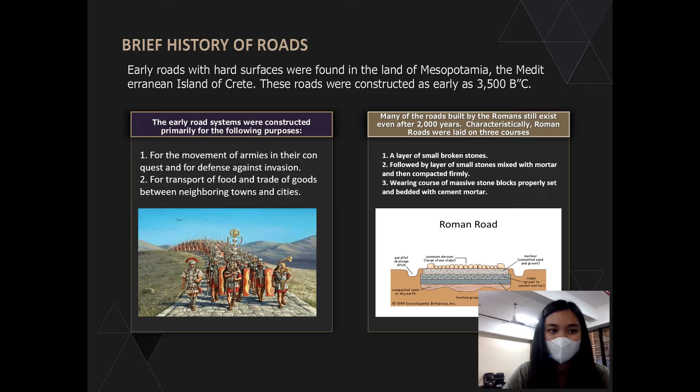During the 17th century, under the reign of Napoleon the Great, France made great strides in road building. Jerome Tresaguet created the first scientific method of road construction and maintenance in 1764, and he was successful in improving the drainage, stone foundation, and road grade.

Napoleon was able to construct roads and highways in France as a result of his achievements. He was a French engineer best known for his improved methodology for road construction. According to him, it is not necessary to prepare the top with heavy stones; instead, small and broken stones can be used. The benefit of this top layer was that it was rammed or rolled by traffic, so the stones jammed into one another, forming a stronger, resistant surface which offered less obstruction to traffic.

Thirty years later, a Scottish engineer born in Westminster Abbey, an engineer and founder and president of the Institute of Civil Engineers in London, improved Tresaguet's construction method by using stones with a minimum thickness of 3 inches, a maximum height of 7 inches, and a breadth of 5 inches. He also used a flat subgrade, which allowed for a variety of stones in the construction. He believed that by using heavy foundation stones above the subgrade, the road would be more firm.

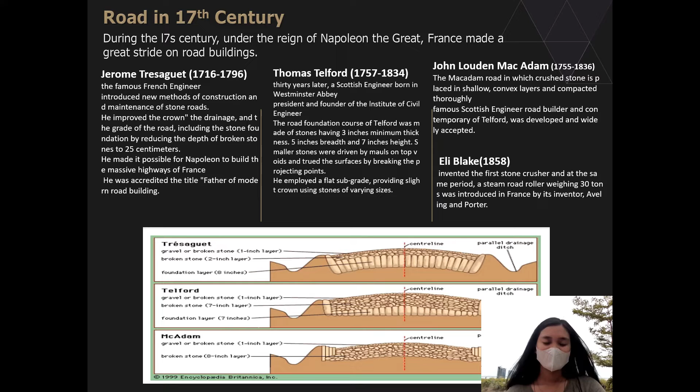It's incredible to think that modern engineering technology has transcended and simplified human activities over time. So let's go over a brief history of national roads in the Philippines.

Roads have historically been regulated for similar reasons. The early Saxon laws imposed three mandatory duties for the people to perform, namely to repair the roads and bridges, to repair the castles and garrisons, and to aid in repelling invasions. There was also a decree issued following the Norman conquest of England.

The King's Highway is sacred. Anybody who occupies any portion thereof by exceeding the boundaries of his land is considered to have encroached on the king himself. Roads are for public use, and all persons who want to use them may do so. So in conclusion, the king's highway is considered sacred.

Landowners should not go beyond the boundaries of the king's domains. Property owners adjoining the roads were required to drain the road, clip any bordering hedges, and refrain from plowing and planting trees, shrubs, or bushes closer than the specified distance from the center of the road. So those who live near the road must drain it and refrain from planting flora which may cause inconvenience to commuters. It was clear at that point that the public had a responsibility to protect and maintain the road.

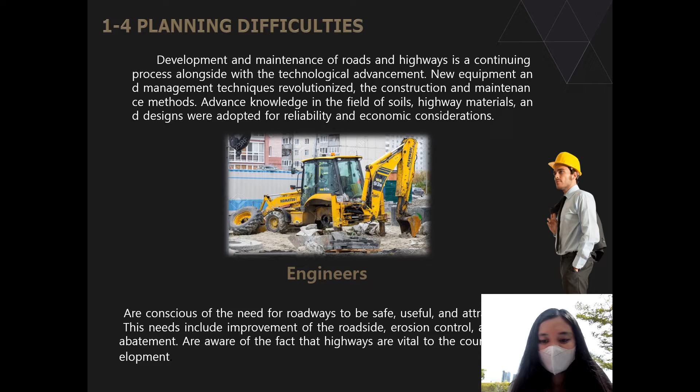Highway planners are confronted with problems categorized as financial, political, and technical. The present economic condition is related to government budgetary expenditures for payment of foreign debt amortization amounting to billions of pesos a month.

Comprehensive road development plans carefully studied by technical experts are twisted or flexed down by political muscles to suit political interests. Roads and highways plans were either deferred, amended, or realigned for political reasons. As a consequence, different laws with conflicting purposes and procedures impede or obstruct implementation, causing delay or no action at all.

Politicians now control DPWH projects as their source of political funds. Highway district engineers' qualification is simply subservience to the political do-what-I-say-or-get-out-of-my-district mentality. The listing of projects given to the district engineer has the corresponding name of favored contractors, the willing victims giving SOP in cash advances.

Rational planning is no longer the objective process based on training and expertise concerning the actual needs of the people, but is rather a political decision. Not even the Secretary of Public Works and Highways could say no, because politics is a power that controls appropriation, budget, and appointments of the presidential cabinet members.

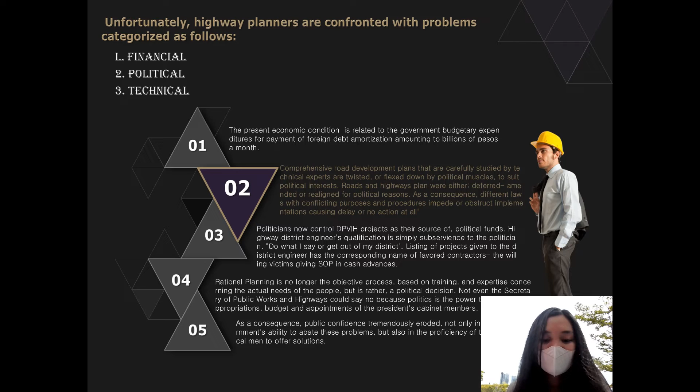As a consequence, public confidence has tremendously eroded, not only in the government's ability to abate these problems but also in the proficiency of the technical men to offer solutions.

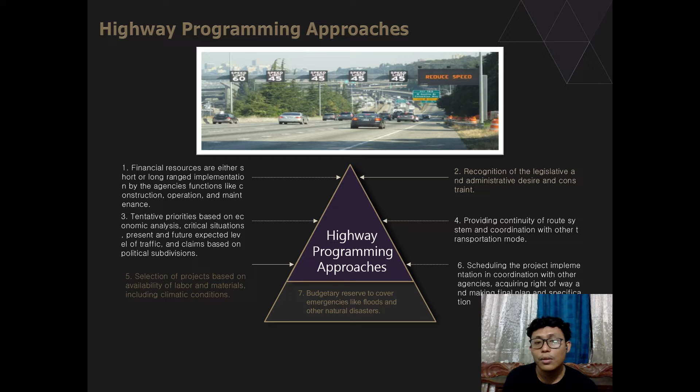Fifth is selection of projects based on availability of labor and materials, including climatic conditions. Six, scheduling the project's implementation in coordination with other agencies, acquiring right-of-way, and making final plans and specifications. Seven, budgetary reserves to cover emergencies like floods and other natural disasters. So those are the 7 highway programming approaches.

Next is direct effects of highway construction and its use. There are three: quantifiable market value, non-quantifiable non-market value, and quantifiable non-market value. First is quantifiable market value, cost of highways as to planning cost, like the salary of engineers, plan preparation, and permits.

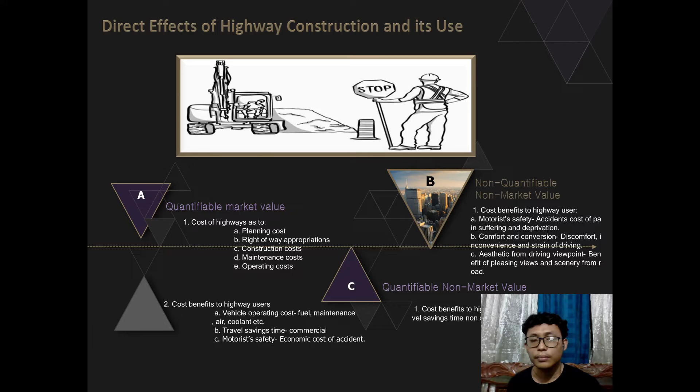So next is the planner. Before any project comes to reality, it has to undergo rigorous and careful studies with participation of several line agencies involved, where proposals may be opposed and questioned by other agencies or in the political mill. The planner appoints a coordinator or catalyst to work out exchanging information as to the needs, goals, and alternative solutions of those who are affected, and to incorporate them into the planning and decision making.

Where planners act as coordinators, catalysts, or community advocates, they should not be either partisan or advocates to a particular solution. So the planner's role is to provide technical and organizational support, to receive inputs or information on the needs and goals of affected persons, groups, or agencies.

Third is to incorporate the above for planning and making decisions. So the planner's role must be of a clarifier, expeditor, conciliator, and impartial negotiator. So next, the myth of rationality must be avoided.

Tangtangon nimo sa imong mindset na for example ang isa ka person na best siya sa iyang field and he is a professional, dili porke professional siya na dira pa ka maminaw niya lang. Unsay iyang suggest, ipaminaw sad nimo ang suggest sa uban, i-take into consideration nimo, kay what if na day siya mas better plan for the project. Dili nimo siya paminawon kay porke katong isa ka tao na-excel siya sa field, imo na lang siyang tangtangon.

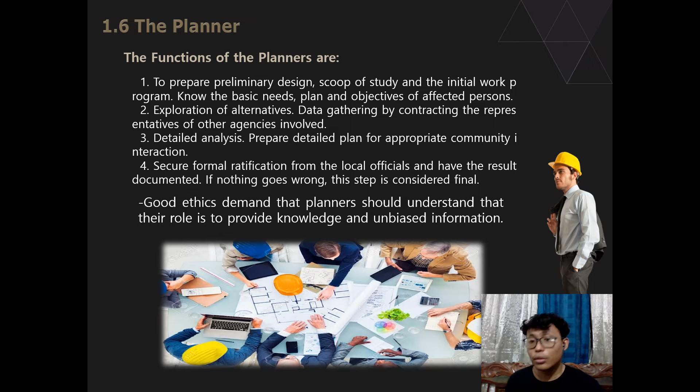So good ethics demand that planners should understand that their role is to provide knowledge and unbiased information. So as a planner, wala kay dapat panigan. Kung naa giay suggest na nindot pero naa say suggest na mas nindot, mo-prefer ka sa mas better na idea, kay unlike dira na nindot siya pero mas better ang pikas. You should not take sides, for example kay amigo diri ang idea dili kayo nindot, kay amigo pud dito, dili nimo siya pilion. Wala kay pilion na side, so you should be neutral as if you are the planner.

Next is community involvement. Public hearing should involve the public from the start of planning to give them a chance to participate in discussion, and involve them in soliciting the cooperation and support of public officials, non-government organizations, influential persons, and conservative groups of the community.

Next is to create a special staff to carry out this function. Next is leadership, community leadership opportunity to participate continuously in the planning stage. Next is organize and development, to organize and develop skilled persons to conduct group meetings, workshops, hearings, and other related activities.

So it is common practice to call public hearing after all major decisions were made and approved. This makes it no more than an information forum to let the public know what the administration wants for them, rather than what the people wants from them.

So this means that before magplano kung unsay buhaton sa project, dapat i-announce daan sa mga tao, instead na after na human nagplano tanan, na padong na tukod. Mostly kasagaran mura na lang og tabo diri, na ngala lang ang mga tao, na i-post na lang sa Facebook na mo ni ang plano, or giapapilit dito na tarpaulin na motukod diri, nana.

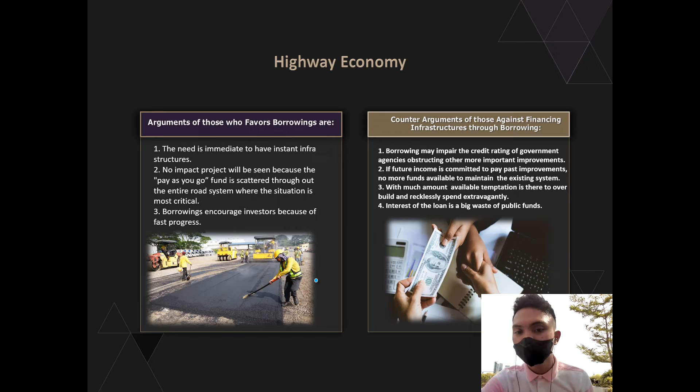So the computation and survey.

Early engineers' approaches to highway and transportation problems were based on the results of their computation with the aid of slide rule, later replaced by calculator machines. This method was time-consuming and was totally discarded with the advent of computers and its appurtenances.

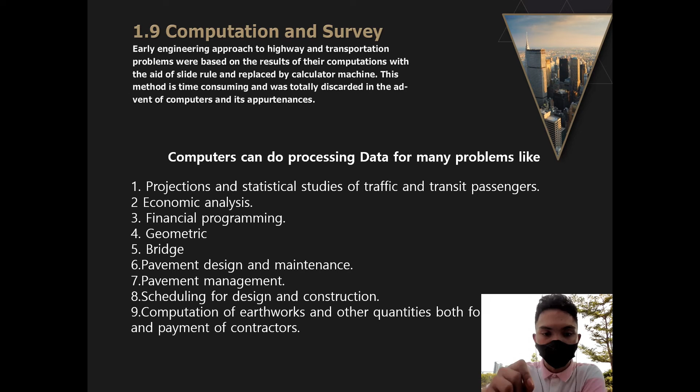So here, 1.10 remote sensing. The definition is otherwise called photogrammetry. It is the science and art of obtaining measurement by photography. Photogrammetry is based on aerial photographs for engineers working data.

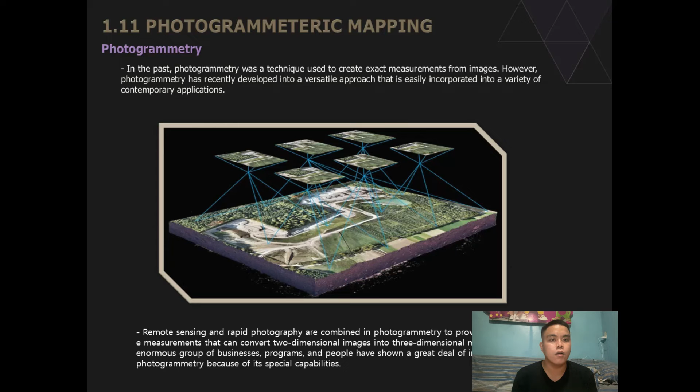First, what is this photogrammetric software? Photogrammetric software is a crucial component of the everyday operations of the surveying business since it is incredibly adaptable and the best option for those looking for a way to acquire surveying and mapping data.

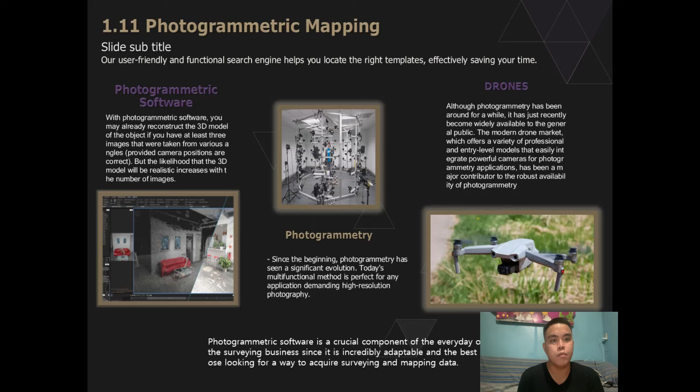Next slide: the area to be covered is photographed in parallel runs with the individual pictures lapped in the direction of the flight and between successive runs.

For stereoscope uses, the following must be considered: first, end lap must be greater than half the picture width specified, not less than 55%, no more than 65%. Second, side lap should average at 25%, with less than 15% or more than 35% being unacceptable. Third, in making map purposes, the variables include the focal length of the aerial camera, the desired combination of map scale and contour interval, and the ratio of map scale to photograph scale.

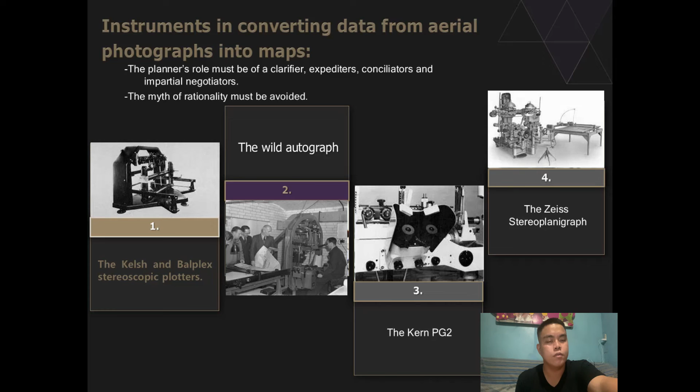Trails were the origins of early roadways. People's movements and the usage of motor vehicles pushed road officials to enhance road alignment by reducing abrupt bends. Road width was standardized and gradients were leveled. New highway sites are combined with curvature gradients and other roadway characteristics to provide pleasant driving conditions.

So to enhance roads, a preliminary plan for controlled minimum design speed, roadway cross-section, and maximum slope should be developed considering the following: number 1, reliable cost estimate; number 2, character and hourly distribution of traffic; number 3, economic and community benefit factor; number 4, availability of funds.

Let's proceed to the local surveys in rural areas, which are divided into 4 stages. Number 1, reconnaissance survey of the entire area between the terminal points. Number 2, reconnaissance survey of all feasible routes.

First, let's define reconnaissance survey. A reconnaissance survey is an extensive study of the entire area that might be used for a road. The purpose of the reconnaissance is to eliminate those roads or sites which are impractical or unfeasible and to identify the more promising roads or sites.

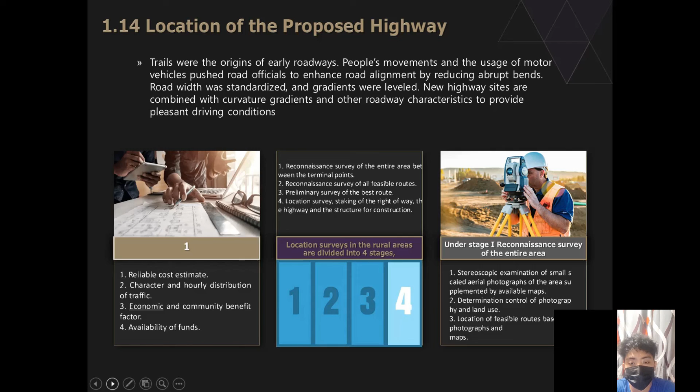Now let's move on to stage 2, reconnaissance survey of feasible routes. Number 1, examination of large-scale aerial photographs of each route. Number 2, determination of the detailed control of photography and land use. Number 3, preparation of route maps by photogrammetric methods. Number 4, location and comparison of feasible routes on photographs and maps. Number 5, selection of the best route.

Now let's go to stage 3, preliminary survey of the best route. First, prepare large-scale topographic maps utilizing route images and photogrammetric techniques, or prepare large-scale topographic maps by ground survey, led by optimal route placement produced on photographs.

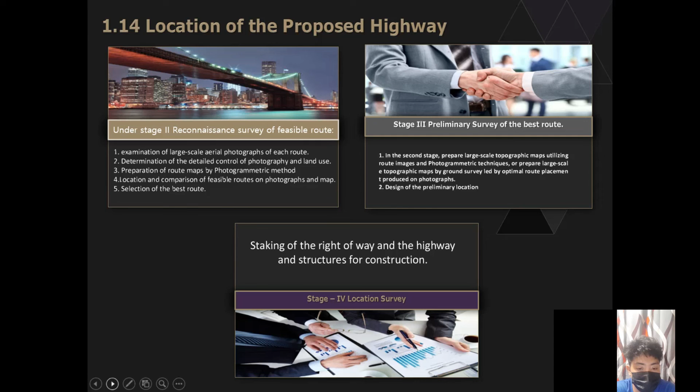So the second one, design of the preliminary location. So let's proceed to stage 4, location survey: staking of the right of way and the highway and structure for construction. So let's proceed to the next topic.

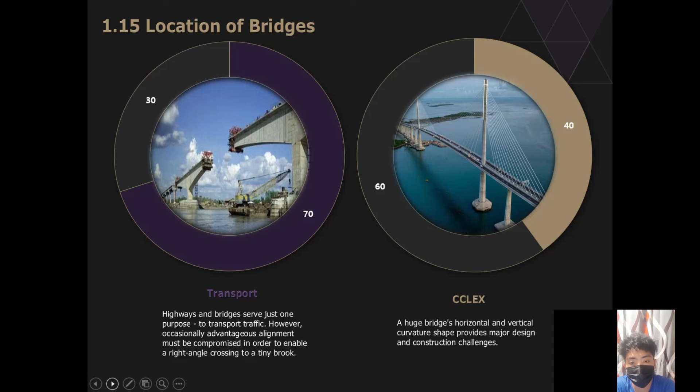Lesson 15, location of bridges. Highways and bridges serve just one purpose, to transport traffic. However, occasionally advantageous alignment must be compromised in order to enable a right-angle crossing to a tiny brook. A huge bridge's horizontal and vertical curvature shape provides major design and construction challenges. So the bridge survey report should be accompanied by accurate data on the waterway and the historical behavior of the water. The bridge survey data shall include the condition, stream characteristics, and the adjacent structures on the stream, more particularly the waterway opening. When the location of the bridge is approximately determined, the following requirements must be considered.

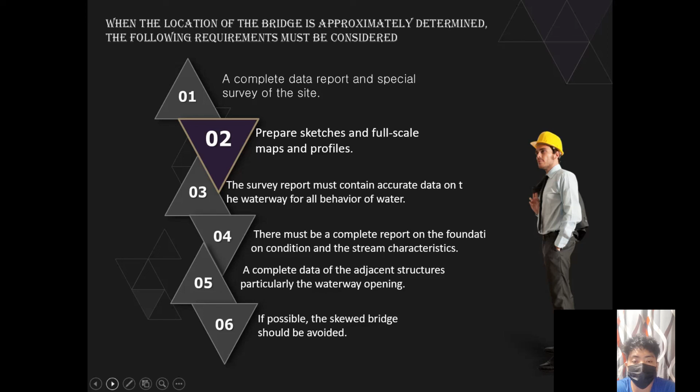1. A complete data report and special survey of the site. First, start with an introduction, set the tone by explaining the purpose of the survey. Number 2, use visualization; images and graphs are an effective way to tell a story. So, prepare sketches and full-scale maps and profiles. Number 3, the survey report must contain accurate data on the waterway and the behavior of water. Number 4, there must be a complete report on the condition and stream characteristics. Number 5, complete data of adjacent structures, particularly the waterway opening. Number 6, if possible, the skewed bridge should be avoided.

So we're done with lesson 15, so let's proceed to lesson 16.

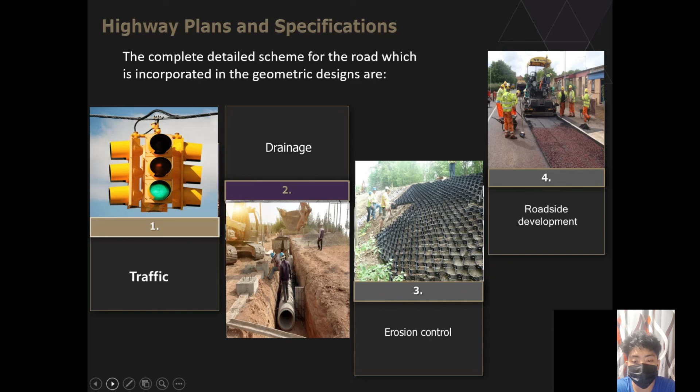Highway plans and specifications. Plans and specifications include instructions and criteria for construction of highways, bridges, and other infrastructure projects. The specifications are written instructions and conditions considered as an integral part of the contract between the contractor and the highway agency, classified as legal documents. The complete detailed scheme of the road, which is incorporated in the geometric design, are: number 1, traffic; number 2, drainage; number 3, erosion control; number 4, roadside development; number 5, structure; number 6, soils; number 7, pavement.

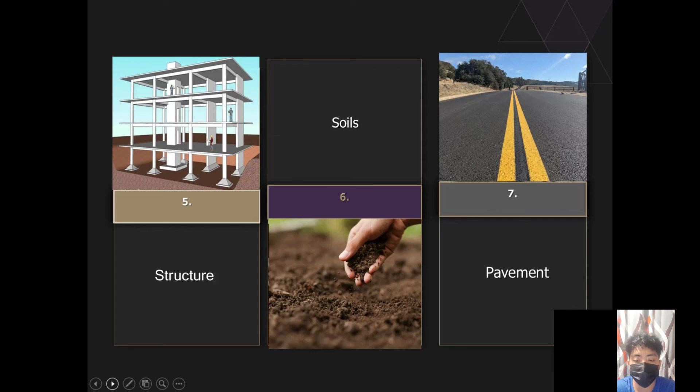Presentation of a road plan. Number 1, the upper sheet is allocated for the plan top view, showing the horizontal alignment, right-of-way takings, drainage arrangement, and other features. Number 2, the lower half is allotted to the profile where the original elevation of the ground surface is plotted. The roadway centerline and the vertical alignment or grade line for the road is indicated. Number 3, the vertical scale of the profile is usually exaggerated, enlarged from 5 to 10 times for precise detail.

Number 4, the profile and other details of the drainage channels or connecting roads including ramps are also presented. Number 5, the estimated earthwork quantities for every 50-meter station or other intervals are indicated along the bottom of each sheet, along with the estimated overhead. This will serve the engineer and the contractor. Number 6, the roadway cross-section for every situation in the whole project stretch is indicated on another sheet of the plan.

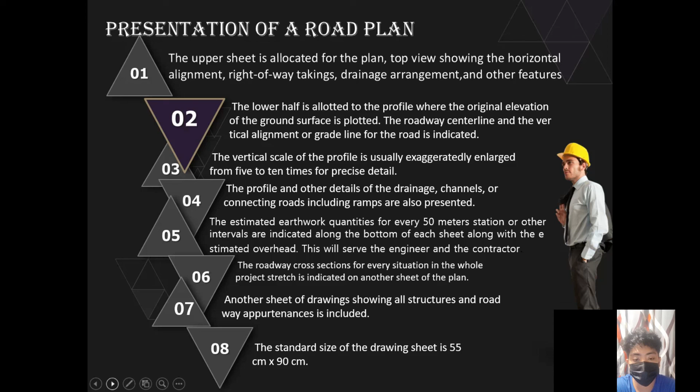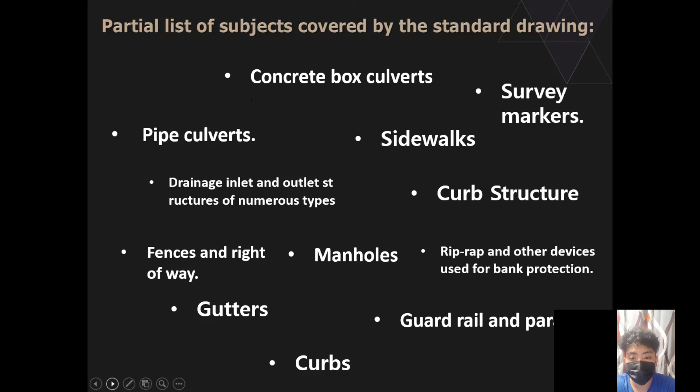Number 7, another sheet of drawing showing all structures and roadway appurtenances is included. Number 8, the standard size of the drawing sheet is 55 centimeters by 90 centimeters. Among the partial list of subjects covered by the standard drawing: number 1, pipe culverts, concrete box culverts, guardrail and parapet, curbs, gutters, curb structures, sidewalks, drainage, inlet and outlet structures of numerous types, manholes, riprap and other devices used for bank protection, fences and right-of-way, and the last one, other survey markers.

So let's proceed to the specifications. Specification drafting is a difficult undertaking that necessitates knowledge of contract law as well as road practices and experiences. Inadequate materials and craftsmanship may emerge from requirements that are carelessly prepared and poorly expressed. It generally involves an additional cost to the owner or contractor and has resulted in legal action.

So highway specifications are divided into two. The first one, standard specification, applies to projects implemented by the administration which treats subjects that repeatedly occur in the agency's work. The second one, special provision, covers particular items of the project in question that include additional modifications to the standard specification. This includes copies of all documents required to secure competitive bids and contracts.

Specifications are also subdivided into two. The first one, the general clause, deals with the bidding procedures, award, execution and control of work, and other legal matters. The second one specifies details regarding the materials, manner of work execution, and how the pay quantities are to be measured. That's all. Thank you.